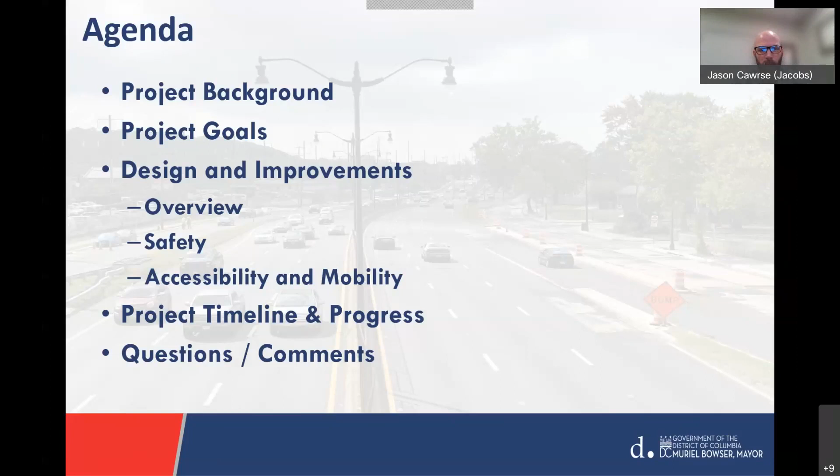As many of you are aware, on June 23rd of this year, the Lane Place Pedestrian Bridge collapsed after it was hit by a truck traveling southbound on DC 295 with its subframe in the raised position. The DC government responded quickly, cleared the road, and got it reopened to traffic in less than 24 hours. Shortly thereafter, the bridge abutment was removed for public safety.

In July of 2021, Mayor Bowser signed an emergency declaration to provide funding to expedite the design work necessary for DDOT to replace the Lane Place Pedestrian Bridge. DDOT mobilized a team immediately to scope the project and to begin the design, looking carefully at what sort of improvements could be brought to the project, feasible locations, and constraints and challenges in the project area.

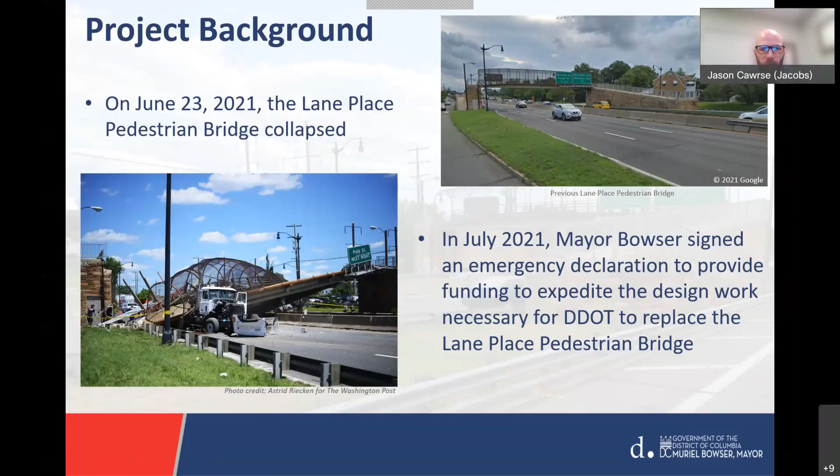During those initial studies and scoping, DDOT really wanted to look at how to improve this crossing and make it safer. They wanted to get the crossing as close as possible to the prior bridge location, but also stay within DDOT right-of-way or public space to avoid any impacts to private property.

As you can see, this is a fairly challenging site. It's very congested. There's very limited public space available with private properties, both residential and commercial, directly adjacent to the service roads on both sides of DC 295. Those private properties have curb cuts, numerous curb cuts in some places to access the properties. And in addition, there's also numerous utilities in the project area, both overhead and below ground, including Pepco Power, Verizon, RCN, Comcast Communication, Washington Gas below ground, and then DC Water with water and sanitary sewer facilities in the project location.

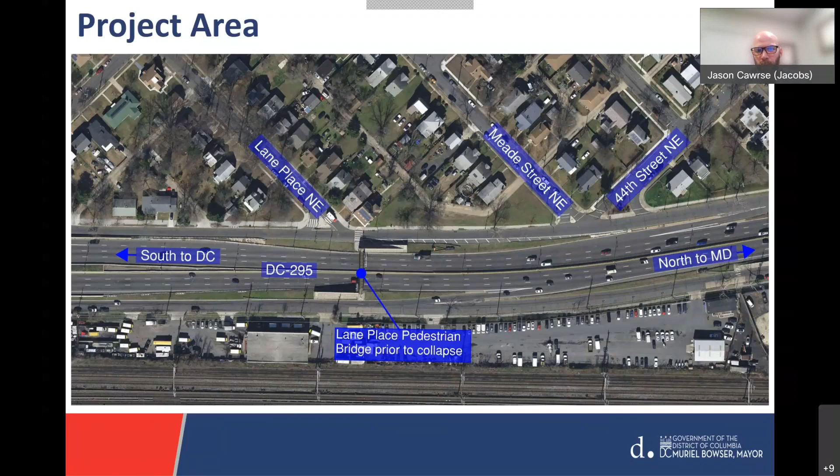Even though we identified a good location for the bridge, we still had challenges as the design moved forward. Those challenges included the location of the access ramps to the bridge, again avoiding curb cuts since those are valuable to the businesses and residents they serve, the numerous utilities I explained, and also the fact that the new bridge crossed over an existing access ramp for vehicular traffic from the service road onto DC 295. That fell clearly within the project area and may have posed a challenge as we moved forward.

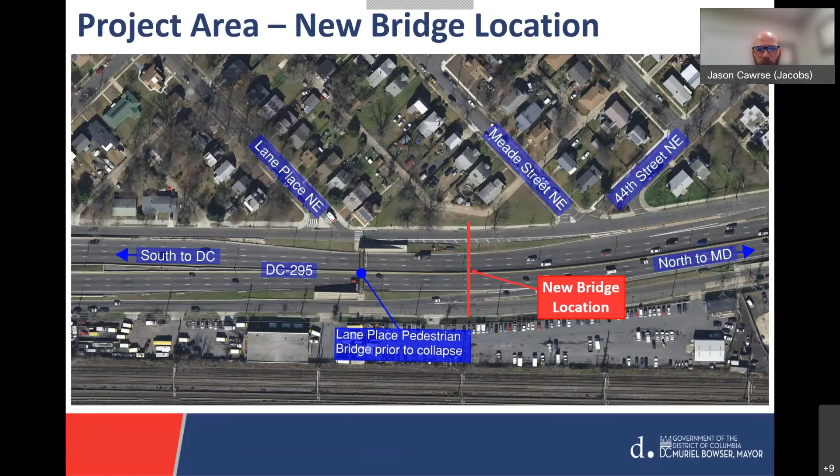So with the project scoped and the location known, we established goals for the project as we started the more detailed design. Those goals were to replace the bridge on an accelerated schedule, to improve pedestrian safety and accessibility, and to design the new bridge to meet current standards.

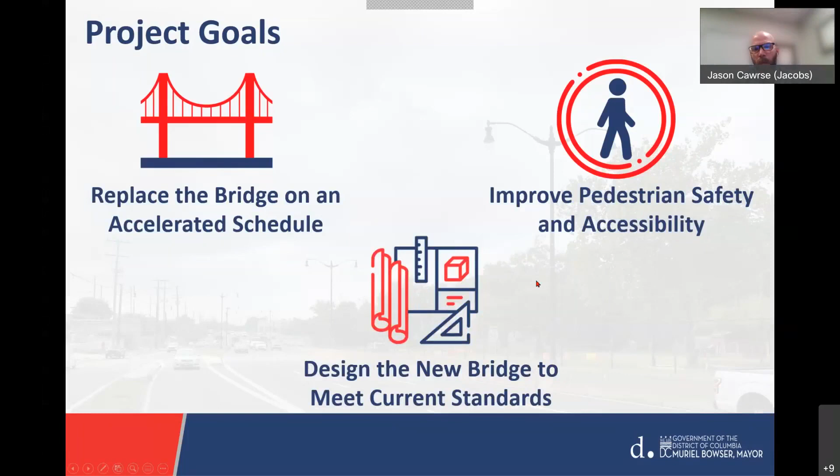Next, I'm going to walk you through the design on this screen. One key thing to note immediately is that the bridge and the project are completely within DDOT public space. That means there are no property impacts, and we've also avoided any curb closures with this design.

In the middle of the screen you'll see the main span of the bridge crossing over Kenilworth Avenue, spanning approximately 146 feet. On either side of that main span you see the bridge access ramps and stairs. I also want to point out the realigned service roads on both sides of DC 295 — we needed to realign these to accommodate the new bridge in its current location.

As I spoke about earlier, the access ramp onto DC 295 that was previously in this general location has been relocated approximately 500 feet to the south. Finally, what's not included on this image is the power line relocation work we're working on right now with Pepco for a design that will accommodate the new bridge, anticipated to be completed this spring.

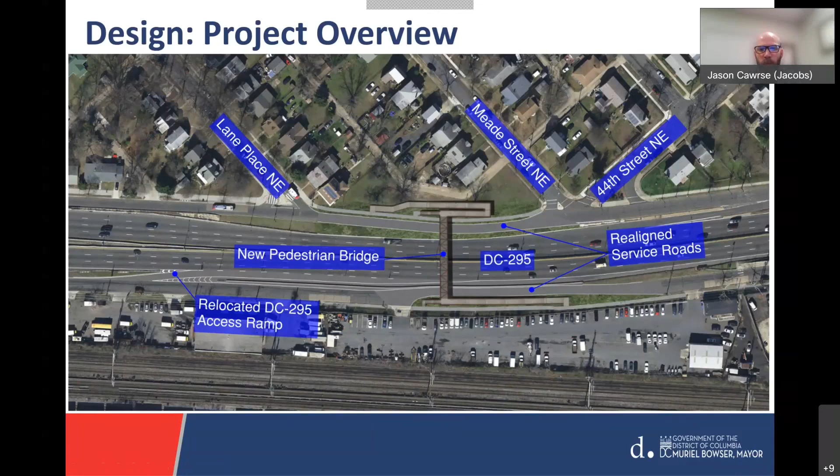So this image... excuse me.

Can I just interrupt you there? I think we missed you for about half a minute on the last slide — your voice went away, we just saw a slide with some writing on it. Yeah, I was having a bit of technical difficulty with the slide progressing. I stopped speaking for a while until I got back to the correct slide. I believe we are on the correct slide now.

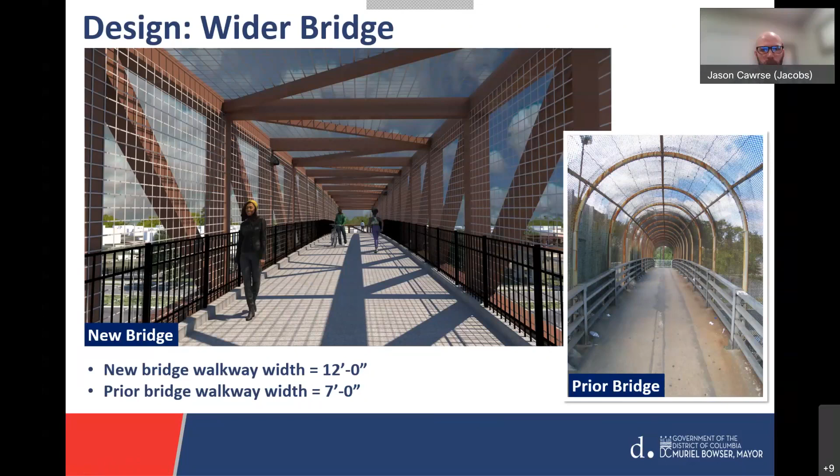As shown earlier, the bridge will have access ramps on both sides. The ramp slopes will meet the Americans with Disabilities Act requirements, meaning there'll be more gradual slopes, less steep than the prior bridge ramps, better accommodating users with mobility challenges. With a higher bridge and more gradual slopes, these ramps will be longer.

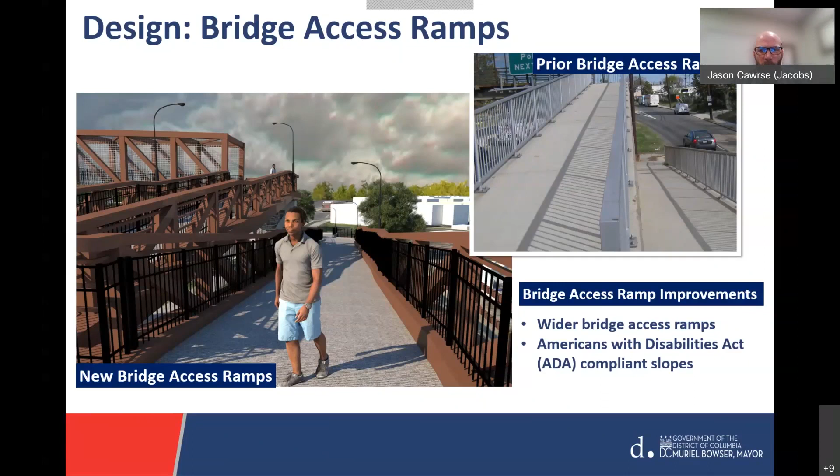I briefly touched on this earlier in the presentation, the need to relocate the DC 295 access ramp to accommodate the new bridge location. The existing access ramp, shown in the upper left, is very short with very little distance for vehicles to accelerate and merge with 295 traffic. Oftentimes when you're out there, you'll see vehicles come to a complete stop in order to wait for an appropriate gap to merge with the 295 traffic.

By relocating this ramp 500 feet to the south, we're able to improve the ramp. The design provides for a longer access ramp onto DC 295, which is going to increase the acceleration length and merge distance. That new ramp is shown here on the right side of the image.

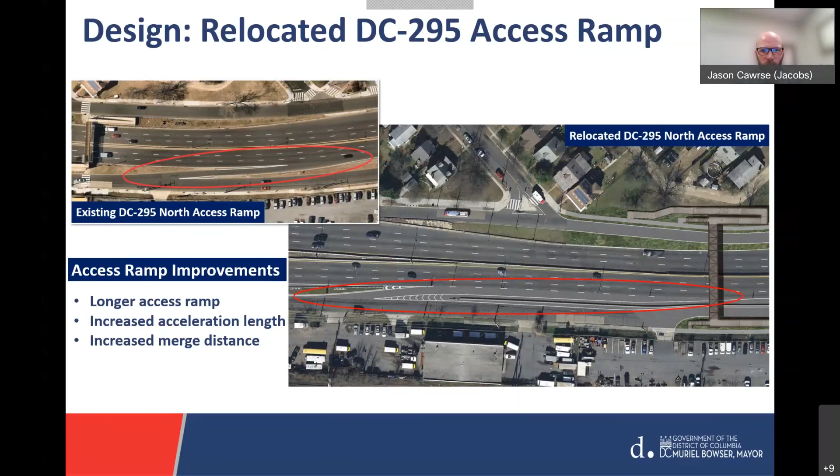So I'm going to close the detailed design discussion with an update on the bus stops in the project area. The bus stop locations were coordinated with WMATA during design development. WMATA and DDOT took into account safety of pedestrians, buses, and vehicles, and also the current ridership at these bus stops.

Some of the changes occurring: in the top left of this image, the existing bus stops at 42nd and Lane, shown here in green, are going to be replaced with a single new bus stop on the south side of Lane Place, shown here in blue. All other bus stops adjacent to the new bridge, shown in white, will remain in their current location.

For the location of the bus stops relative to the new bridge, the bus stop shown in white in the lower left is approximately 400 feet from the bridge access point. The stop on the lower right is approximately 250 feet. On the upper right, the bus stop shown in white is 450 feet. And the new stop in the upper left is approximately 250 feet to the access point of the new bridge.

For the project timeline, as we stated earlier, this design started very quickly in August of 2021. It's been progressing very well, and we anticipate completing it in the summer of 2022. After design completion and approval, the project will be advertised for construction. Once construction is awarded and NTP is granted to a contractor, we anticipate approximately 12 months for construction of the new bridge.

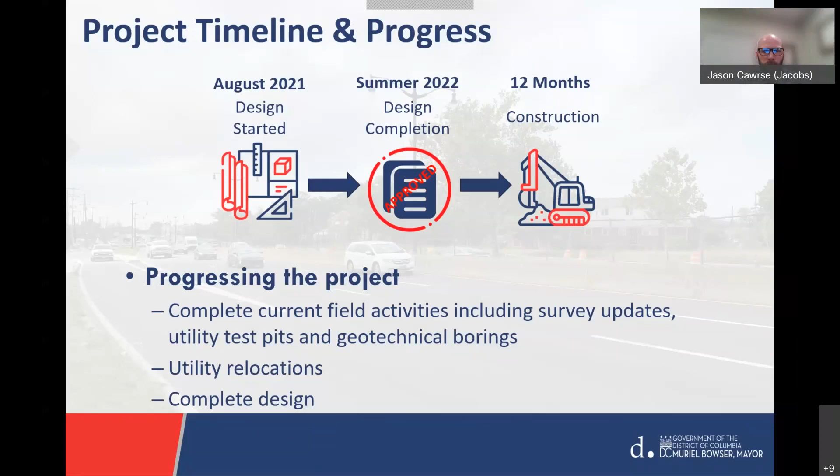Thank you, Jason. As we mentioned earlier, the website will be updated as new information is available, and it does include frequently asked questions. We recommend you visit and take a look at those questions in case there are some that were not answered or that you still have, which we could answer through the website.

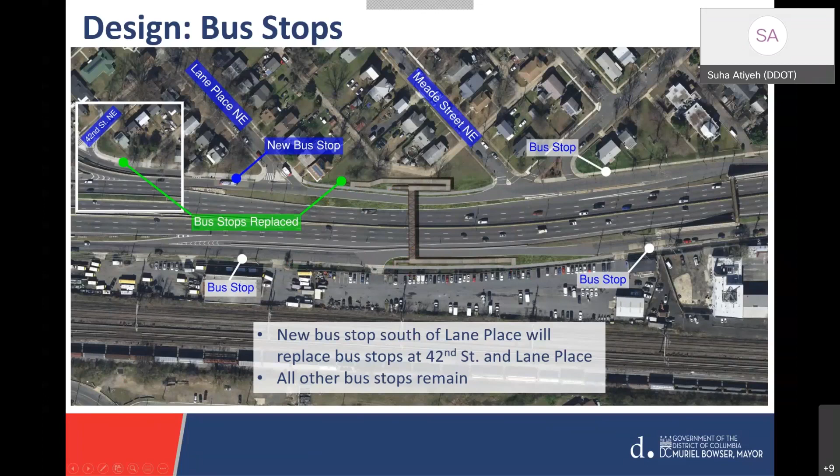It's not as clear on the graphic for the other side. Jason, if you go to the project overview slide with that rendering, I think it'd be more clear. Yeah, that's where I was going.

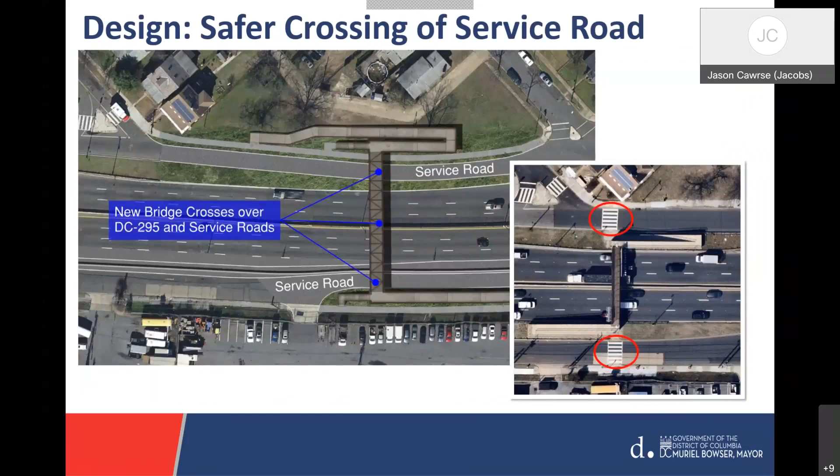So this slide better shows what I was trying to depict in that 2D view. Thank you. So you can see the bridge, this is the service road below, and you see the bridge spans over the service road, so there's no at-grade crossing of the service road on either side.

And the stairs, that's the ramps, from sidewalk access? Correct. Yes, ma'am. And the other one is, so if the design was 2021, design complete is 2022, and 12 months out, so we're talking 2023?

In terms of completion, yes, there is an advertisement period. So design completion will be mid-2022, and then the project will advertise for construction for contractors to bid on it. Once it's advertised and bids come in, they're evaluated, a contract is awarded, and then a contractor's provided notice to proceed. Depending on a number of things, that period can vary from a few months to maybe even 6 months.

I know this is on an expedited schedule, so I'm sure we will be pushing ahead trying to get that done in a very short time frame. Once that is awarded, when they get into construction, we're anticipating a 12-month duration. Thanks, David. Jason, did you have anything?

Are we there? Well, thank you for those comments. We're lighting up these bridges like you haven't seen—like a sort of Christmas lighting tree? No, I'm not going to say that. We're lighting them up. We're making them as visible as possible. We have a staircase at either end, which is an alternate route.

Which is an alternate route for most people using the bridge who are not ADA compromised. Yeah, I think we have an improvement on what was there, and I can see what you're saying about where we have people coming out to this bridge and hang out there with not the right things in mind. You'd be waiting a long time, I think.

If you can, look at the design here. There is an elbow right there on both sides. So the question is, if I'm coming up the handicap ramp and want to go around, I have to go all the way up and then come around to come back down to take the bridge and go across. That would be the same thing when I get to northbound.

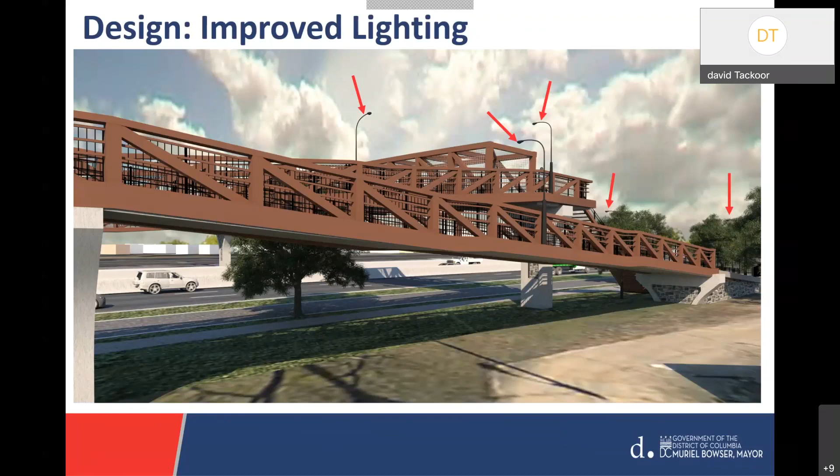If I'm coming from northbound to southbound, even if I take the stairs down, the question is about the people using the handicap ramp, that U-turn there. I don't know, based upon the design, if the person coming up the ramp can see around the bend, talking about around the bend onto the main bridge, and the ramp that goes to the main bridge. Yes, I'm talking about southbound and the Eastland Garden side.

Yeah, the heights of those truss structures are not very tall, on the order of 3 to 4.5 feet. That'll shake out as the design is further developed. But yeah, you will be able to see around this bend. Yes, you can see through it, just like you see it there. There's a cage, so you can see through it.

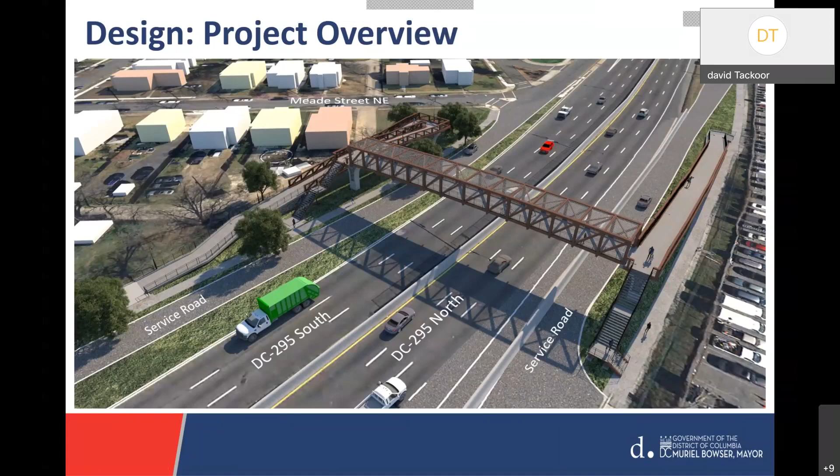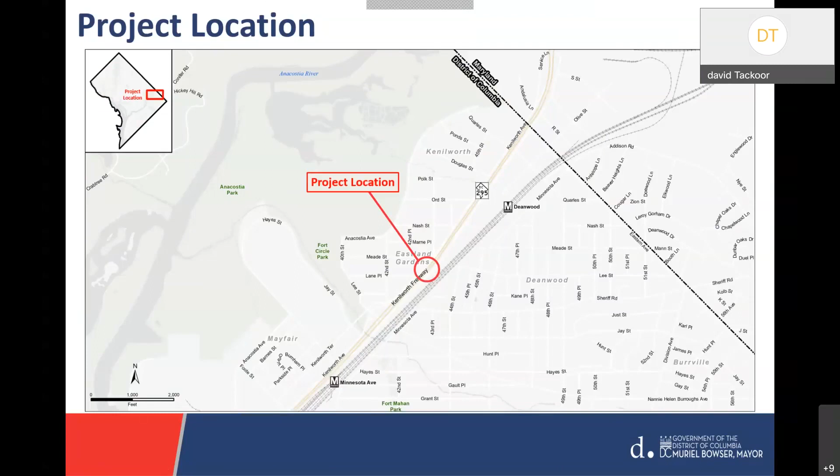No, may I make a suggestion? I know you guys and Mr. Line suggested putting up signs. Can you guys not put any kind of signs in that particular area? If you want to put signs, put them on the bridge itself rather than on the bend or on the ramp, because that was the problem we had on Lane Bridge. There were signs placed on Lane Bridge at the elbow. Yes, I see. Yes, I know what you're talking about.

We're not mounting traffic signs onto this bridge, but that would cause a blind spot. I can see where you're coming from. They will be ground-mounted signs. So signs saying going to Aquatic Gardens or wherever will be ground-mounted, not on the bridge. Correct, yes. Okay, because those signs used to create a blind spot. Very good point. Okay, that's all I have.

Sorry, what about the survey? Have you done any survey to the community? As far as I know, I have not seen any survey. Ms. Alberta Paul knows very well that she did a survey 10 years ago, and I was one of the participants because I utilized the bridge. So when did you guys do a new survey to determine the quantity of people who use the bridges, Nash and Lane Place?

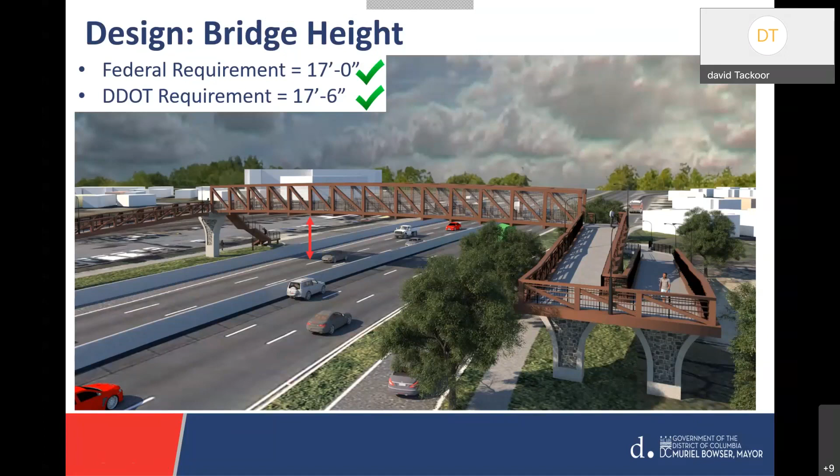Well, we know at least one of these bridges has got to be replaced because of the distance between these bridges, this bridge and Douglas Bridge, and the one that's just been constructed. So we're putting this one in at least, and I think the jury's out on the other one, but it'll take a lot of governmental and administrative consideration and stakeholder feedback, and of course a modern day survey of the usership into account as well.